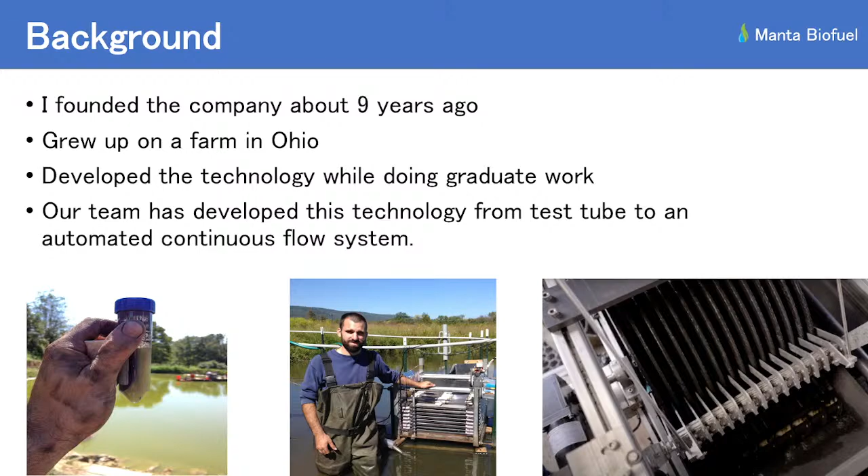We'll get into what we do and how our system works. Some of it should be pretty familiar. Some of it might be new. And then show you the pilot runs that we've done, some of them in Illinois. All right, so the first thing is, I'm going to step back here just a bit so I can see. So I founded this company about 9 years ago, and we've been working in cleaning water, mostly removing suspended algae from water, for close to 10 years.

And I've got an interesting background in that I grew up on a 2,000-acre grain farm in Ohio, so I don't mind getting my hands dirty. It's actually my hands right there. But I also have technical training, and the technology I'm going to show you today is stuff that I came up with during my graduate work. So I'm kind of an odd duck, having both this practical background and technical background. And what our company has done is we've taken this technology and scaled it from working in a tiny little test tube like this to various prototypes, some of them more ugly than others, to a fully autonomous system that can basically process and clean water continuously by itself.

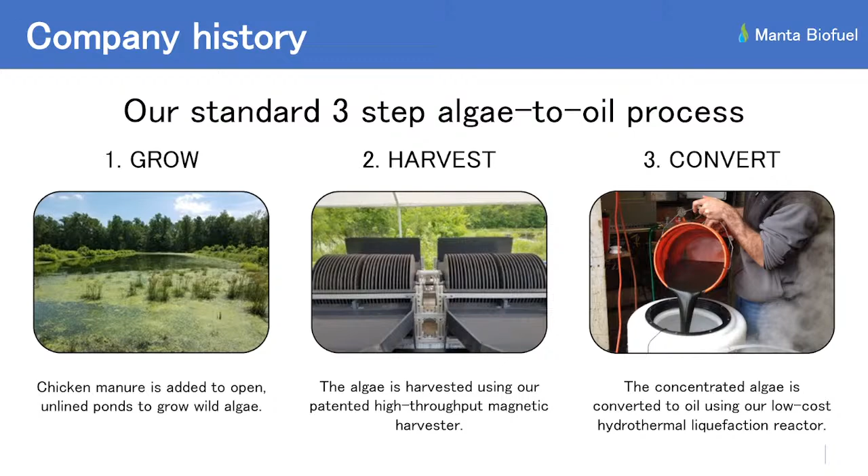All right, so historically, this is what the company has done. We've grown algae, harvested it, converted it to crude oil. And the way we would grow the algae is actually pretty similar to how algae would grow in a lagoon system, except we're using chicken manure to grow it. Then we use our magnetic harvesting system to separate it out of the water, and then convert it to crude oil using a process called hydrothermal liquefaction, which is a bit of a mouthful. But essentially, this is a continuous flow pressure cooker, and it converts that algae, the stuff you probably see growing in lagoons, into something that looks like that.

And you can actually take that and distill it into renewable gasoline, diesel fuel, jet fuel. You can get asphalts, plastics, all sorts of cool stuff. The difference is that you are farming it instead of drilling for it. And again, I grew up on a farm. About half of my family's corn goes to ethanol. This is just the next step in that. So at this point, you might be wondering, how did these guys get into wastewater? Because it doesn't seem like the transition is too easy.

And basically where we got to is we were working on finding a filtration system to put on the end of our separator, like a polishing system. And we were working with one of our vendors, and unfortunately the system he had didn't work for us. But he mentioned that lagoon operators often have issues with algae, with suspended algae. And so he gets calls from them all the time to deal with that, but unfortunately his system doesn't work that well for that. But the system we have was purpose-built to do exactly that. And so it does it very effectively.

And so what we did is we basically started calling around. We've talked to about three dozen people in different states, including Illinois, to see if that is actually an issue. And basically what we heard is this, which is that during warm weather, you can get overgrowth of kind of suspended algae. It can mess up TSS. This issue is usually temporary, but it's difficult to deal with.

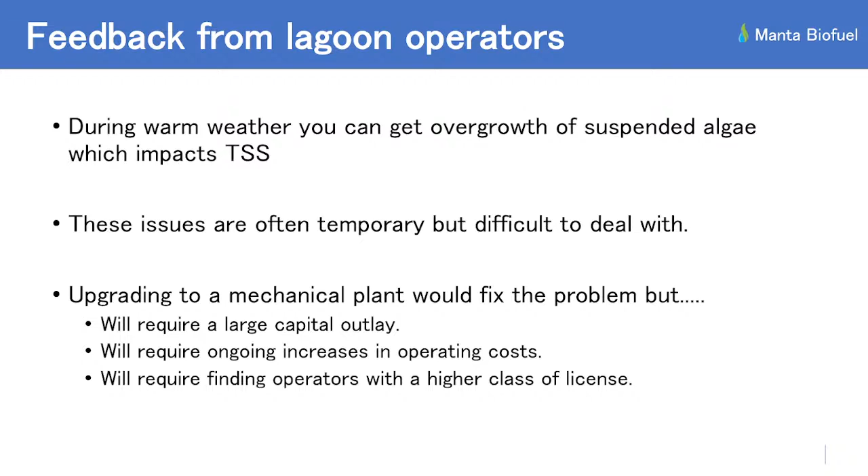Best way to solve it would be if you just put in a mechanical plant to fix the problem. And the but there, which we've heard many times, is that, yeah, you can do that, but that's going to take a lot of money. You're going to have ongoing increases in operating costs, and you're going to have to find an operator to run that. And what we've heard is that finding an operator for lagoons can be challenging enough. Finding operators for a mechanical plant would be even harder.

And by the way, if you guys have any questions, feel free just to stop me whenever. Happy to answer any questions.

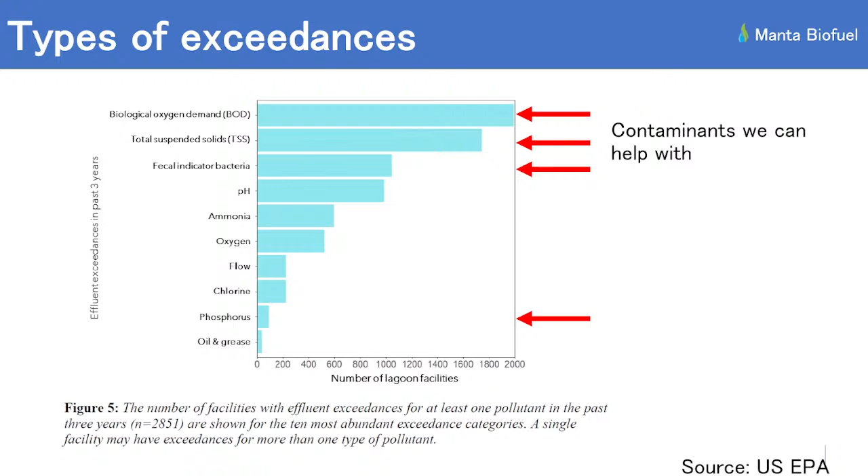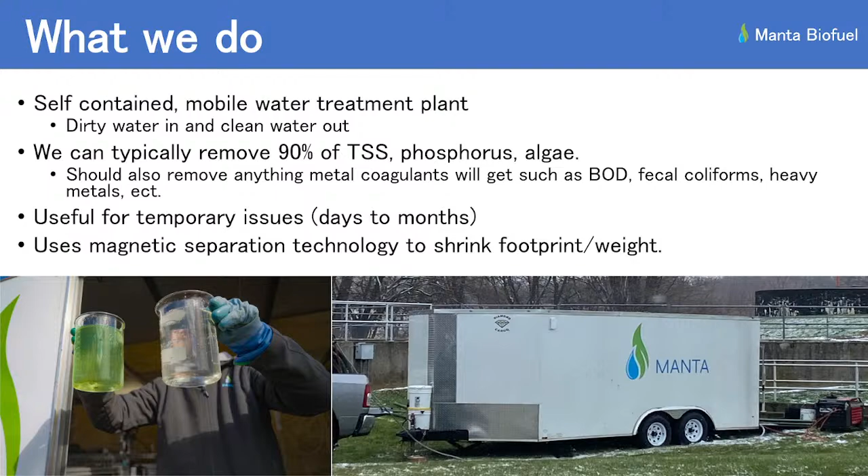All right, and so what do we actually do? So our machine is essentially a self-contained mobile water treatment system. At the simplest level, it's dirty water in, clean water out. And so you can see some of the water going in, some of it going out, and you can see the difference there. And I'll show you the actual numbers in just a bit. And so we typically get about 90% of the contaminants out, TSS, phosphorus, algae.

But the core process that we use has been used in wastewater treatment for decades. It's kind of a metal coagulant process with a bit of a twist. And so we should also get out things like BOD, fecal coliforms, heavy metals, a whole bunch of other things as well in the process. This is useful for any temporary problem, days to months. And it uses this magnetic separation technology. And what that really allows is to really compact the footprint. And I'll get into that in a little bit.

And so this is what our system looks like. And so the question is, okay, how does this thing actually work? What's the magic that's inside of this trailer? And so it's using pretty standard chemical coagulation technology with a bit of a twist. So probably most of you guys have seen this before, but this is chemical coagulation. In a nutshell, you got wastewater coming in, you add a coagulant. Typically these are metal salts such as ferric chloride or alum, but there's others as well.

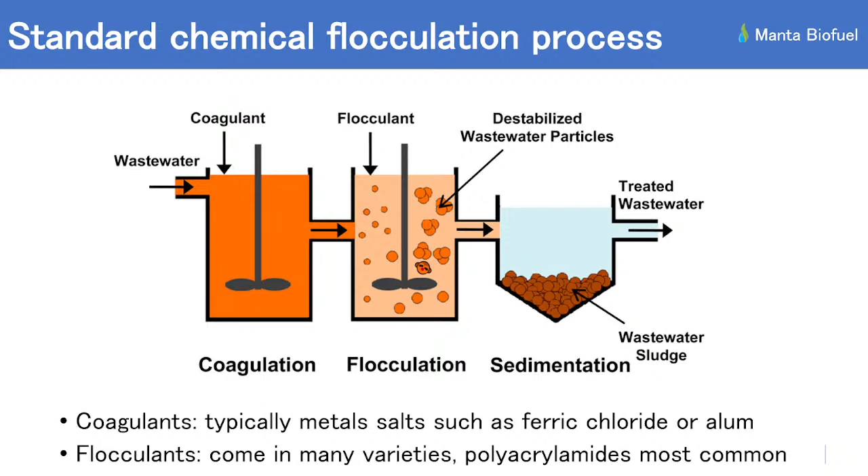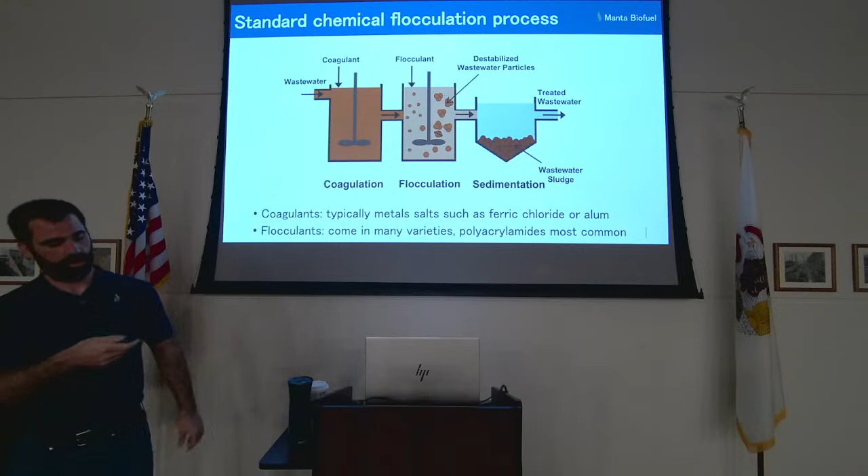And with mixing, you start to get coagulation. You start to get these smaller particles coming together into larger ones. And then you add a flocculant, and this brings these particles together into larger flocs. There's piles and piles of different flocculants, but the most common ones are polyacrylamides. And essentially what you end up with are these large flocs. Flocs can then go and settle out. You get clean water off the top, flocs settle to the bottom. And so you have coagulation, flocculation, sedimentation.

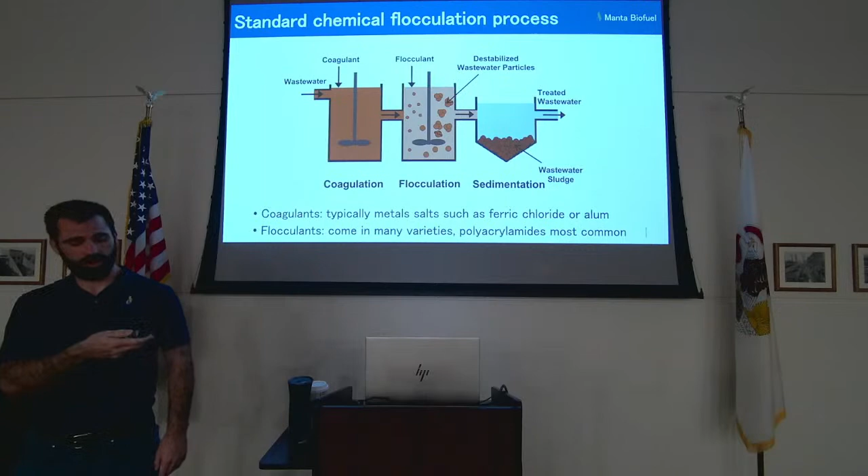All right, almost all of that is the same with what we do, but it's got a bit of a twist to it. So we add magnetite in the beginning, and magnetite is essentially just magnetic sand.

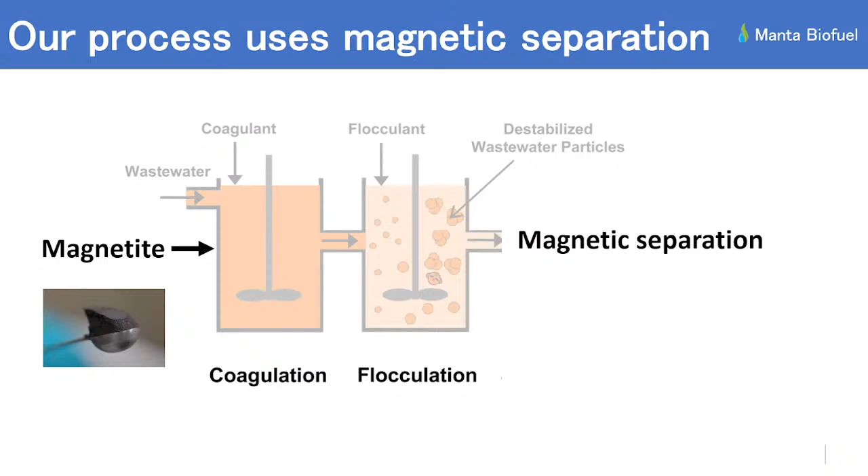If you've ever been to a beach and you see black stripes in the beach, that's magnetite. It's actually used in making steel as well. It's just essentially a magnetic mineral. So we add that to that process, and now in the end, those flocs are actually magnetic. And so you can take a magnet and you can pull them right out of the water.

It's pretty cool. And what also is different, instead of letting the stuff settle, we do magnetic separation on the end of that process. And that allows us to basically do that separation vastly faster. And so I can drone on all day about that, but it's always better to show than tell. And so this is what the process looks like at small scale.

So we have a beaker with some algae. We have magnetite, ferric chloride. Quickly get flocculation. And then you put it on a magnet, and very rapidly, what you end up with is nice clear water. And so before and after, and believe it or not, on the machine, it's actually even quicker than that, because that's just a batch run. The machine is continuous flow.

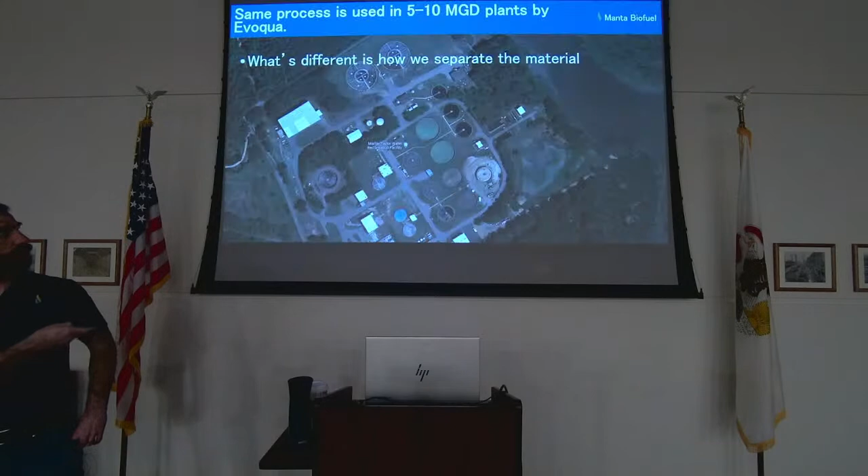And so while adding this magnetite might seem a little exotic, it's actually used by Evoqua. I don't know if any of you guys have heard of Evoqua. They're a pretty large wastewater treatment company.

Sorry. Can you move it over just a little bit this way? Is that possible? All right. Thanks.

So Evoqua uses this sort of process at a pretty large scale, at 5 to 10 million gallon per day plants all around the country. But there's a bit of a difference. What they do is they add this magnetite and it makes those flocs heavy, and they sediment the stuff out. And so that drastically speeds up the process, but still not as fast as what we can do.

And we're working with them right now. We actually have a pilot that we're scheduling. It's probably going to go this month or next month, because they're actually interested in using the technology that we have. But what we do differently is we actually do that magnetic separation. And this is one of the plants that's near us. This is where we're going to actually be doing that pilot. This is Marley Taylor, and this is about, I think, a 4 MGD plant.

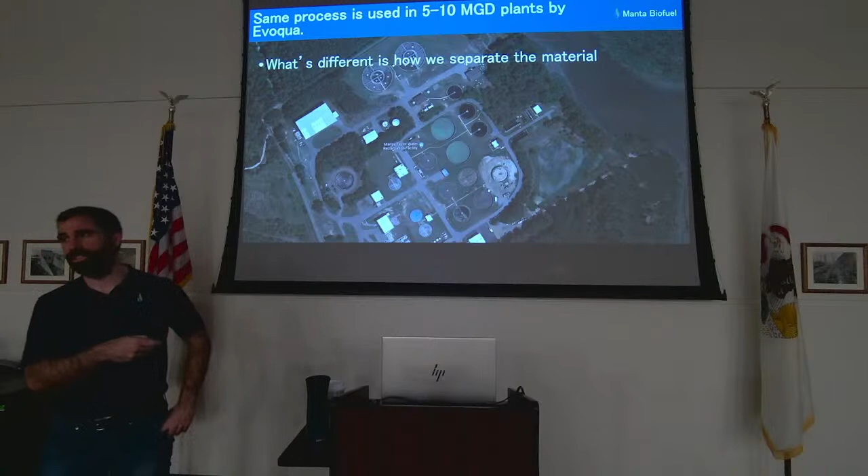All right. And so just to make it a little bit easier to tell what the difference is, as a reminder, once you get that flocculation, you let the stuff settle out, you let it sediment to get clear water going off the top. Our system, we're using these magnetic discs. These are actually magnets that we custom make, custom machine. And we do magnetic separation.

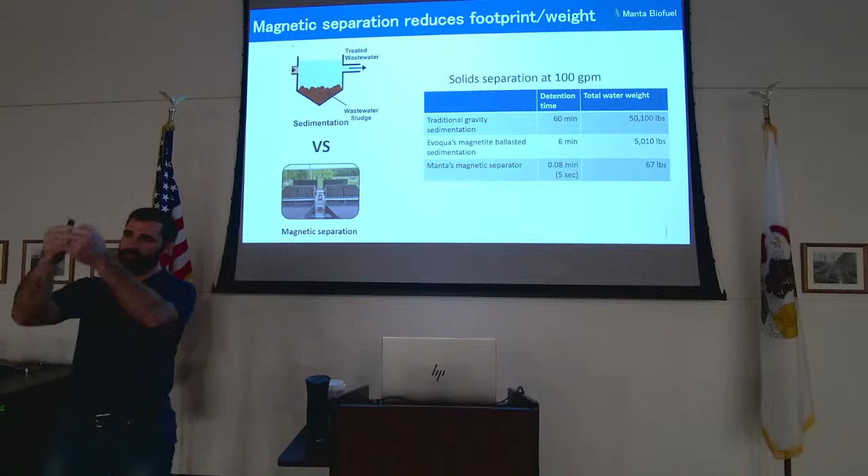And to put some numbers to it, if you're working with a 100 gallon per minute system doing traditional gravity sedimentation, you might need a detention time of about 60 minutes. You might need up to 4 hours, but that's at least a starting point. With Evoqua's system, they call it a ballasted system. They add that magnetite, that makes those flocs heavy, and they settle out rapidly.

And so they claim that they can decrease that detention time by about 10 times, so about 6 minutes. With our system, that separation step takes about 5 seconds. And so you can go from 60 minutes down to 5 seconds. And so that's why we can actually make this mobile.

And part of that comes down to the amount of water weight that you need to have for this. So for a traditional system at that flow rate, you need about 50,000 pounds of water inside the system. If it's built infrastructure, it doesn't really matter. If you're trying to make it mobile, that matters dearly. And so with Evoqua's system, you could take that down to 5,000 pounds. With ours, that's down to 67 pounds.

And so you have a lot less weight in the system and a lot less volume of water. And so that's the real difference right there: because we can separate so quickly, we don't need nearly as much space.

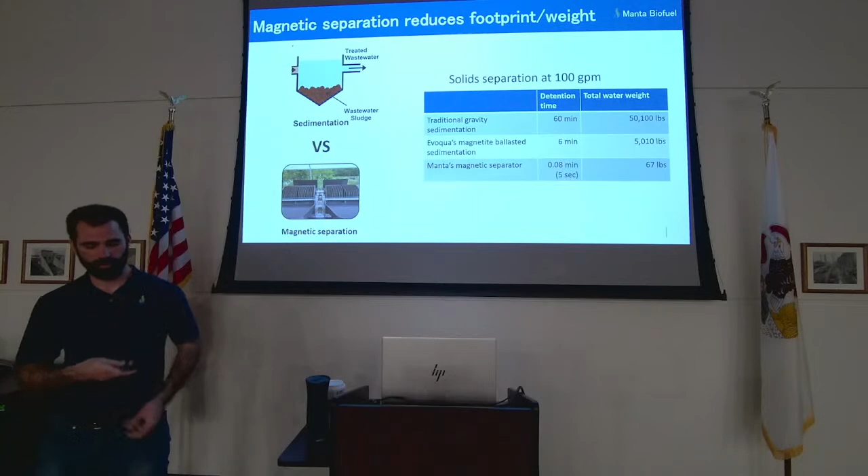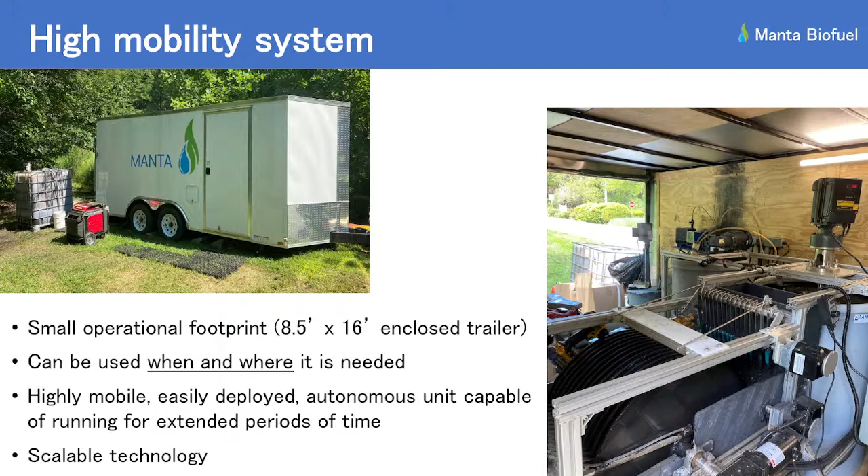All right, so this is what our system actually looks like. This is the separator on the inside. This is all right now within an 8.5 by 16-foot trailer. And you can tow this when and where you need it. It can run on a generator. If you have mains power, you can also run it on mains power. So it's highly mobile, easily deployable, autonomous, and highly scalable.

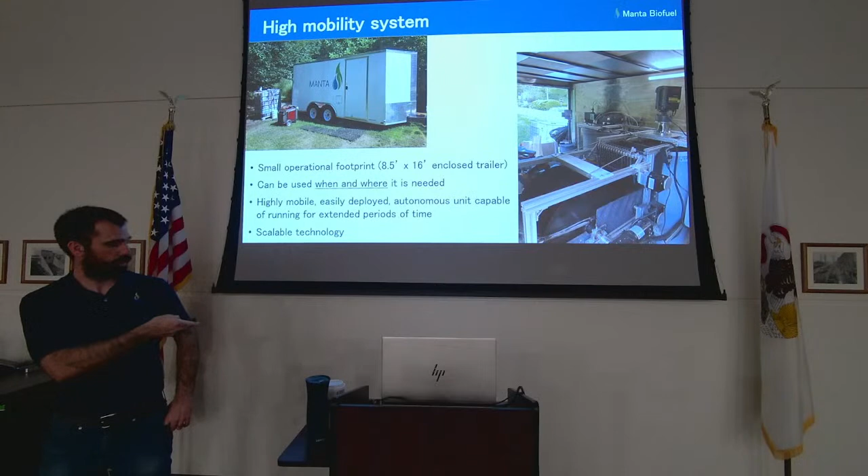And so the way you add more processing capacity is you add more of these disks. So essentially you get your first coagulation in this tank, and then you get flocculation in this tank, it flows to this, and this does the magnetic separation. And so that's how the process works. Again, I can talk about it, but I can show you how this system actually gets deployed.

You can tow the system to where you need it, open it up, and it really quickly deploys. Everything runs off a generator.

This is also a commercial for Honda.

Put the inflow in, get the outflow set up. Relatively quickly, you can have nice, clear water coming out. When you're done, everything packs up, and you can leave.

Does anyone have any questions so far? Nope.

So I would say that right now, the model I think we want to use is to find a local contract operator and partner with them, and then they can get called in basically when and where the problem is, and then leave. Mostly because it's temporary, it doesn't necessarily make a whole lot of sense for the facility to buy that machine. But we're definitely happy to hear what you guys think. What's the best way to go with this?

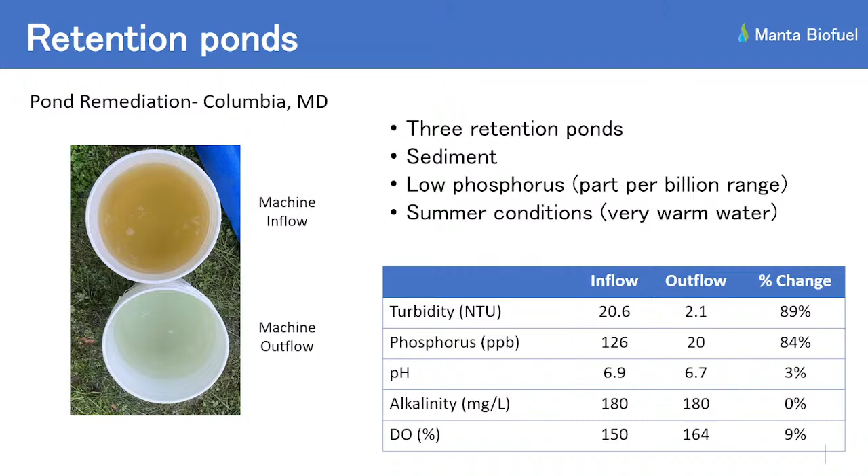And so again, proof's in the pudding. Here's the inflow, here's the outflow, and you can visually see it's much cleaner. And here's the numbers: inflow, outflow, percent change. You can see we take the turbidity down dramatically, phosphorus down below their limit. pH, alkalinity, and dissolved oxygen are essentially unaffected. And this is universal when we're running the system. The other important water quality parameters don't get impacted.

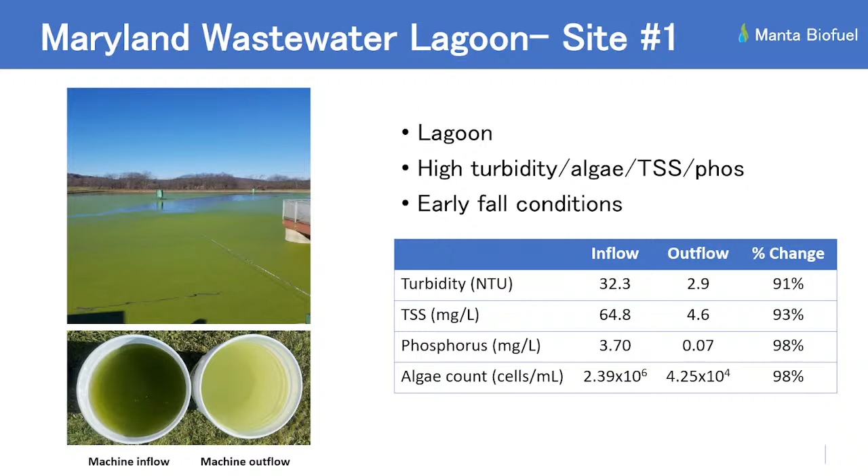All right, so this is a lagoon that we did in Maryland. Again, high turbidity, algae, TSS, phosphorus. These are early fall conditions. It's fairly warm out still. We were in t-shirts when we did this. And you can see, again, inflow, lots of algae, outflow, pretty clear. And you can see the numbers with the inflow to outflow and the percent reduction. Over here, we're looking at between 91 and 98% reduction. So we get pretty quick cleanup of the water.

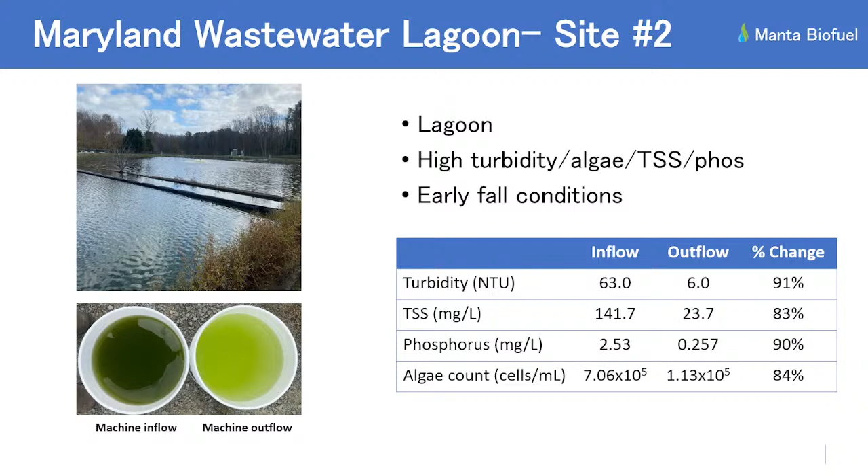All right, so this is another lagoon that we did. You can see inflow versus outflow. High turbidity, algae, TSS, phosphorus. A little bit cooler here, water's starting to cool down. And I'm gonna keep mentioning that because one question we get a lot is, okay, if this can work in the summer, can this work when the water's cold? And we've run this system all the way down to where the water is just a few degrees above freezing. So basically, if the water is not solid, if we can pump it, we can run it.

So here, again, you're getting, on the low end, 83 up to 91%. Nice knockdown of turbidity, TSS, phosphorus, the algae cell counts. Going from 142 there down to 24 in one step.

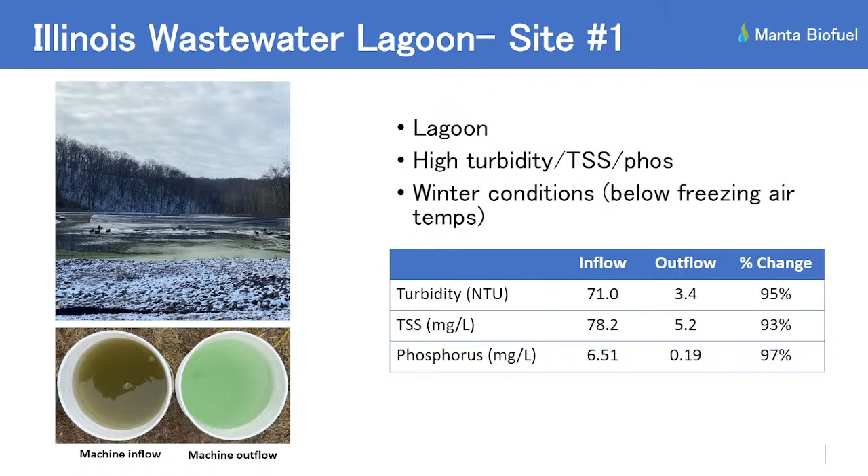All right, and so this is one of the jobs we did in Illinois. And so this is a lagoon, high turbidity, TSS, phosphorus. You can see, again, the visual change is fairly stark. You're going from 71 NTU down to 3.4. And TSS is dropping as well, and phosphorus as well. So nice removal. Does anyone have any questions here at this point? Yeah.

So these were all taken within the lagoon system. So we basically took from within and put it back into the system as well, so we're not actually discharging out of the system. So this number is probably some of the worst case you could see, but yeah, you could take it from outflow and clean it up, but we've got to get all the correct permitting in place before we can do that. This is just to show the technology can work. Does that answer your question?

All right, sorry, keep wandering over here. And so these were in winter conditions. I think air temperatures were around 20 degrees at this point. I remember talking with Kent, standing outside. It's a bit chilly that day. All right.

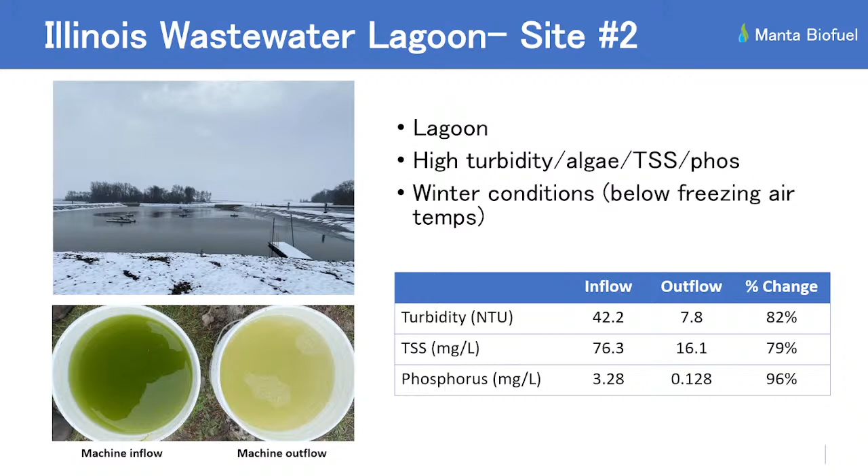And so this is at Dave's facility, Toluca. And so this lagoon, high turbidity, algae, TSS, phosphorus. And we ran this pretty close to the inflow of the system to essentially get the dirtiest possible water we could get. Again, give the system a good challenge. Inflow's 42, outflow's 7, 76, 16, and then phosphorus 3.2 down to 0.1. And visually, you can see a pretty large difference, inflow versus outflow.

And then the last pilot we did in Illinois is actually an activated sludge plant. So here we're not targeting removal of turbidity, although you can see that we did clean up the water just a little bit. This is actually targeting removal of phosphorus. And so I know smaller plants right now are not regulated for phosphorus, but pretty much to a person, everyone we've talked to has said that it's not there yet, but they expect it to be coming at some point. And so that was kind of the challenge that we were working with.

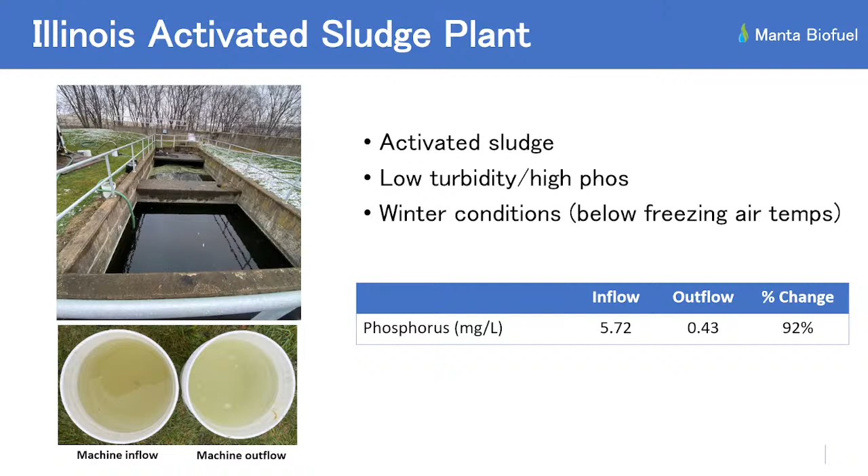And this particular facility has, I believe, a metal plating company that's on it. And that company intermittently causes the phosphorus levels to go quite high, and the system can't remove that phosphorus. And so here we're taking it from 5.7 down to 0.43. And so that's what we were testing with this one.

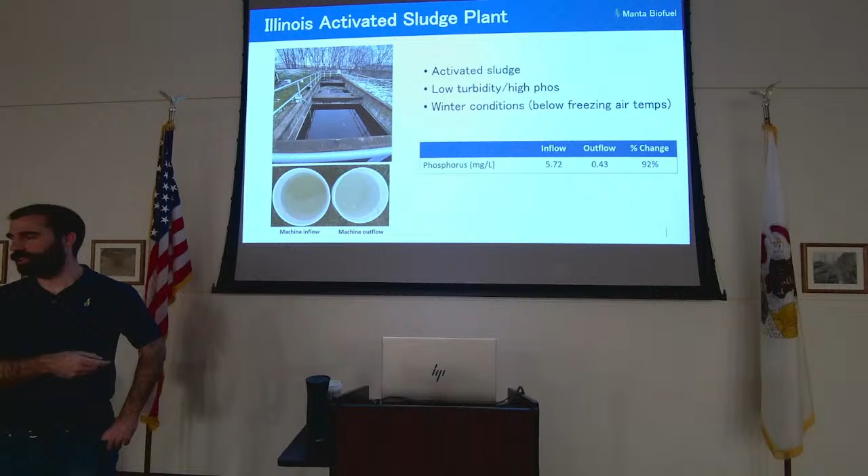Yeah, the clear water and the cold water together definitely make it a bit harder. Dirty warm water is by far the easiest because there's a lot of stuff there to pull together into those flocs. But yeah, that colder water, and that was another cold day. I remember standing out there. That was a bit more of a challenge, but the system performed really well. Once we got tuned in, the machine just runs like a sewing machine.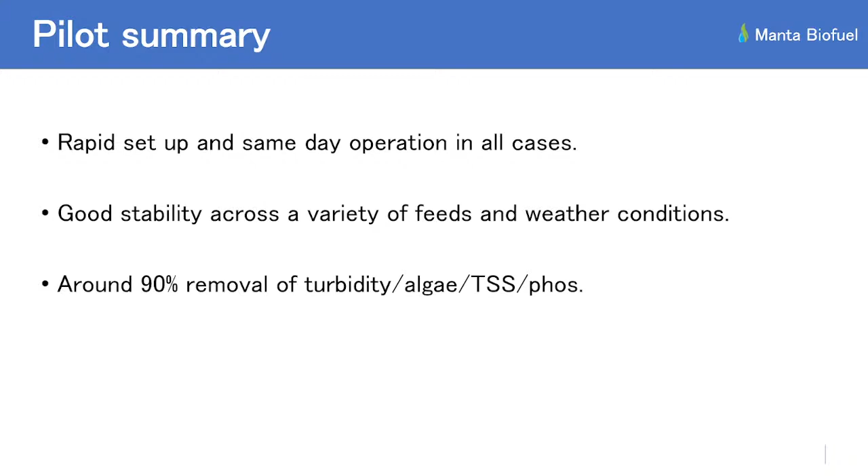So in all these cases, we're able to rapidly get set up, basically in the same day, and operate through once we got set up. We had good stability across a variety of different weather conditions and feed conditions. So I showed from pretty clean water all the way to heavily high TSS water, a lot of phosphorus, different temperatures, all the way from bath water to just above freezing. And in all those cases, we get around 90% removal of those target contaminants.

All right, so this is kind of a summary, and then I'll quit talking. You guys can ask me some questions. So just to remind you, what we're using is really well-known chemistry. We're using metal coagulation chemistry, which has been used for decades, and adding the magnetite itself has been used by Evoqua at massive scale for a long time. So there's nothing new there.

What is new is this separator. And so those magnetic discs, which are a whole heck of a lot of fun to figure out how to make just right, that's kind of the secret sauce. That's what allows us to actually separate this stuff so efficiently. And that's also why Evoqua wants to work with us, because we can make their system even more efficient.

And that's really what allows us to shrink footprint and allows us to put all this on the trailer. Without that, you still couldn't move this around nearly as easily. So right now we're engaging with Illinois EPA. We've got a good idea of what needs to be done to move this forward. It looks like it would probably be a construction permit. Once that construction permit is in place, then you could keep doing this on an as-needed basis.

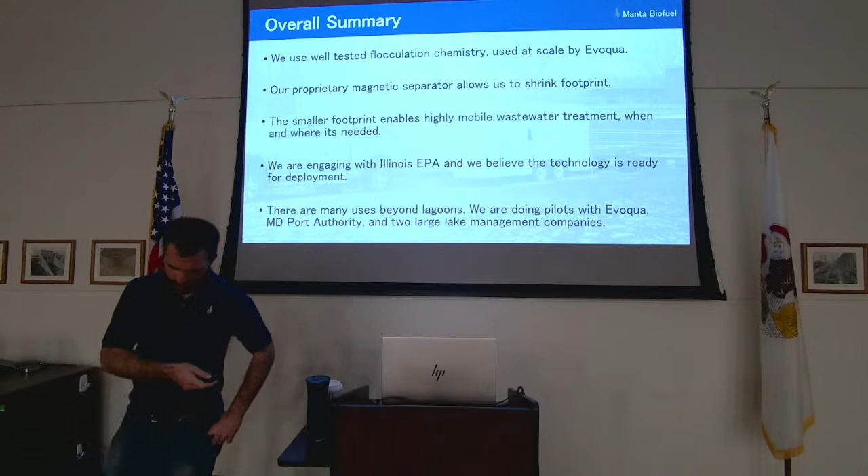But we're doing the pilots with Evoqua. We're actually doing 3 different test cases within their system. And we're working with Maryland Port Authority right now. Maryland Port Authority has kind of a unique use case. Within the Chesapeake Bay, they have these huge ships that bring all these shipping containers in. But the Chesapeake Bay is pretty shallow. So what they have to do is dredge out and make a channel. And all that material that they dredge out, they put in these enormous 100-acre holding ponds.

Once that stuff settles out, they have to release it. But they haven't actually been able to release that water for 7 months because the water doesn't meet their permit, basically. So you can imagine they keep dredging, and that water level keeps going up, and they're getting a little stressed about what they're going to do next. And so we're working with them.

There's also 2 large lake management companies. These are companies that specialize in cleaning up ponds and lakes, and they're interested in using this technology as part of their services. For example, you get ponds that have toxic algae, and people want to get rid of that toxic algae. So this is one thing you could use it for. So there's a lot of different places that you can use the technology, but we think lagoons are a pretty good fit.

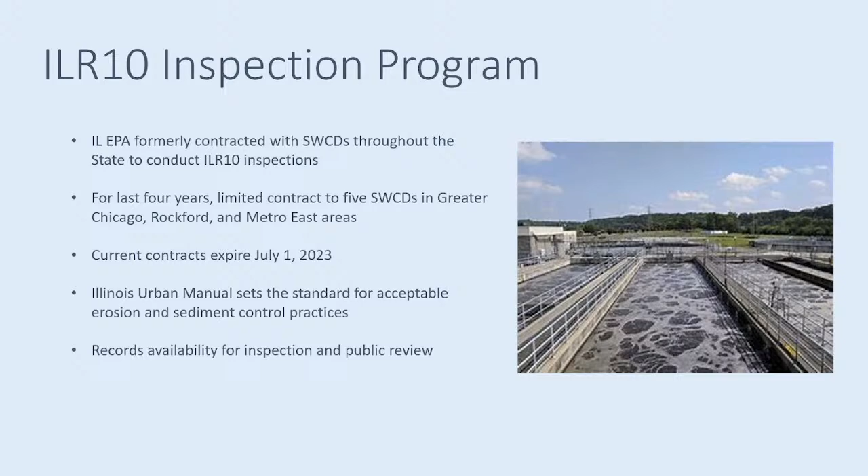I give this presentation to a lot of different folks. I know this isn't so much of a stormwater group, but one thing I wanted to note is that our permit section is basically rebuilding a stormwater permitting program. It's an area where we just have been very short on staffing on the permitting side to give the proper review for the SWPPPs that come in.

And so this probably doesn't affect this group as much, but it is something that is in the works. They're going to hire a manager, a lead worker, and several devoted permit engineers for the stormwater program.

So since December of 2016, the phase one aspect of this e-reporting rule is DMRs. And I think Illinois in particular has been ahead of the game with regard to moving forward. And so I think a lot of the problems have been worked through, a lot of the issues that we've addressed with getting adjusted to the NetDMR system. Well, that's just phase one.

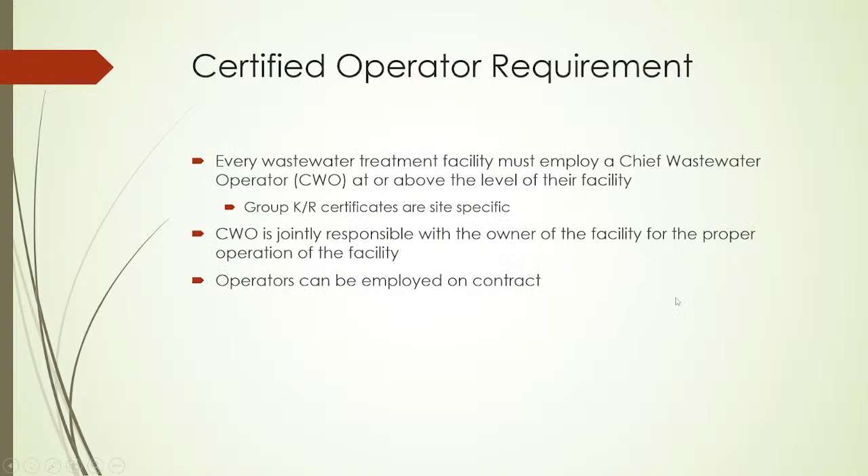So our cert program, that goes from the initial exam period to your renewal period. Every wastewater treatment facility is required to employ a chief wastewater operator at or above the level of their facility as specified in your permit. Group K and Group R, those are industrial systems. Those certificates are site-specific. The operator is jointly responsible with the owner of the facility for the operation of that facility. And as I'm sure you know, operators can be employed on contract.

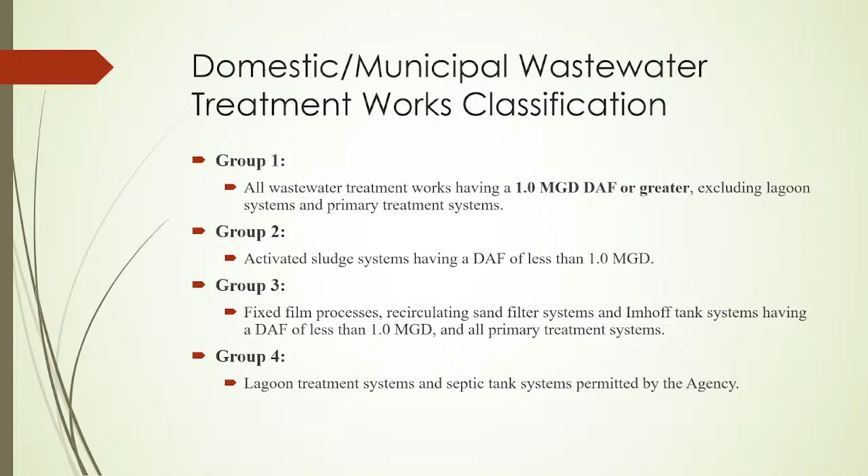I'm not going to go over this too much. Group 1's our highest level of certification and facility classification. Group 4 is the lowest. Group K are our industrials, and Group R are our industrial remediation sites. Okay, back in 2019, we had changes to our operator certification regs go into effect. I hope by now you're relatively familiar with them, but if not, buckle up. These established renewal dates and renewal training requirements, and it also established our operator and training program for initial certification.

So I'm going to go through the certification process because it is a little different. I'm guessing a lot of you in this room are already certified, but if you're going for a higher level or have somebody on your staff that's looking to get certified, it has kind of flipped in reverse. The first step is to take our test, and we no longer review full applications with experience before you take our test. The only thing we need to test is that exam request form, and that is essentially contact information and a few questions. You'll fill that out, send it to our office. There's no fees associated with anything certification-wise on the wastewater side of operator certification.

Once we get that exam request form, we then send you a letter of admission, and they're no longer specific to a site or exam date. It's a general letter of admission. It's good for one exam attempt anytime within the year after that letter was sent. Then it's on the operator to call whichever exam site they want and schedule that test. Our sites are filling up quickly, not as quickly as they were right after COVID, but they are still filling up. So if you have somebody who thinks they want to take the test, I would recommend calling as soon as you think you want to take it. Especially up in Des Plaines, that site tends to fill up pretty quickly.

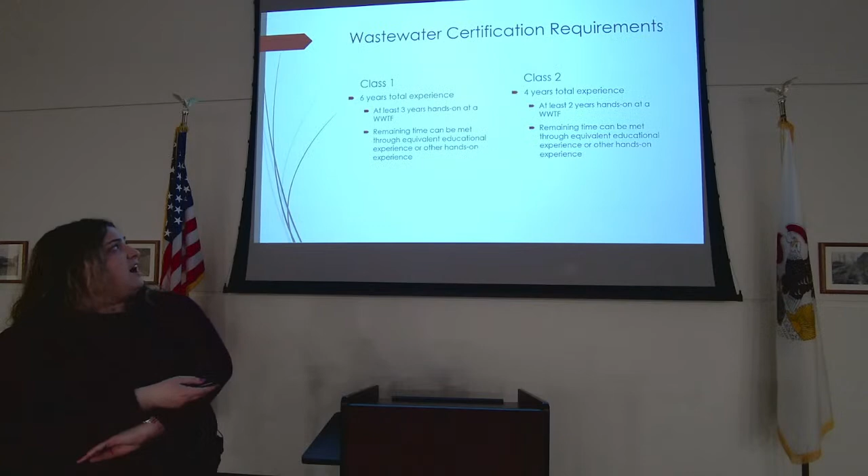I want to go over certification requirements because they did change a little bit from what they used to be. Every level, at least half of the required experience has to be hands-on at a wastewater treatment facility. Class 1 requires 6 years total of experience. If you have 3 years hands-on at the wastewater treatment facility, the remaining time can be met through equivalent educational experience or other hands-on experience, and that would be collection system experience, a public water supply, or at a lab. Class 2 requires 4 years of experience total. Class 3, 2 years total, and Class 4, 1 year total.

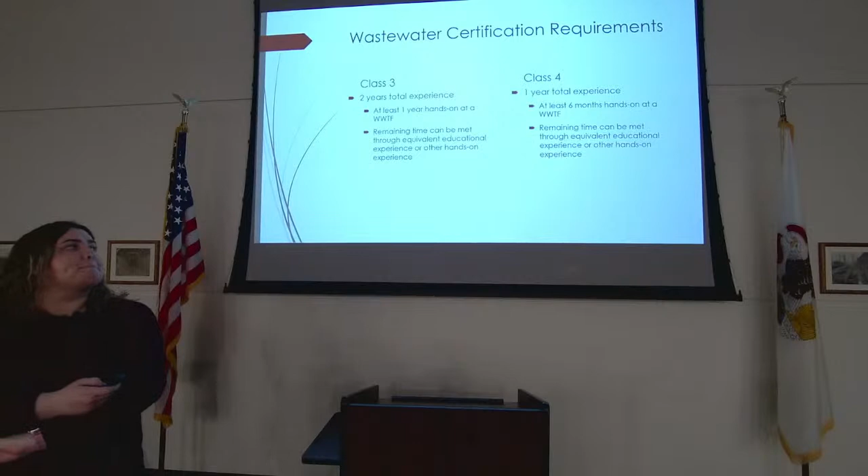Our collection system licenses, those are not required for any facility. That's a voluntary certification. They don't expire. Those require 1 year total of experience, at least 6 months hands-on with a collection system. And then our Class K and Class R, those are a little different. Those are a written exam. The Class K are site-specific. They're graded by our permit section.

If you work at the facility, that's your experience. There's no timeline for how long you have to work there. If you leave the facility, that certificate becomes invalid, and if the facility has significant process control changes, like something that would require a new construction permit, then the Class K operators would be required to retest.

Let's get into renewals. So, fully certified wastewater operators are required to obtain a specified amount of training, and this is just for the Class 1 through 4 operators. The training has to be obtained within the 3-year period that the certificate's set to expire. The licenses are always going to expire on July 1st of whatever year it's due. It's always going to be July 1st. If you get more than the required number of training hours, they don't roll over. You're just smarter, but those don't roll over.

Class 1 and 2 certificates require 30 hours of training. Class 3 and 4 require 15 hours of training. No more than 1/3 of that total can be of a non-technical or professional nature. So at least 20 hours have to be technical for Class 1 and 2. At least 10 have to be technical for Class 3 and 4.

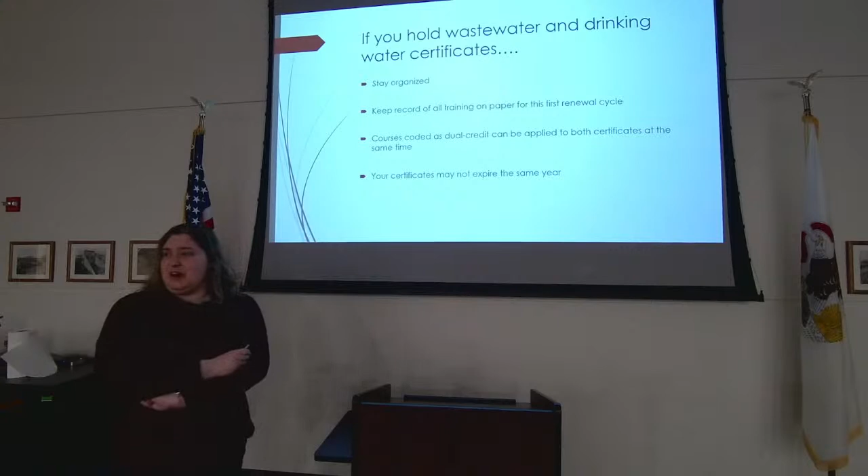Because our database was only built to handle drinking water renewals, when your drinking water license renews, it's going to clear out everything in your training log. So make sure you're keeping record of your training somewhere else in addition to in our database. I hope your licenses expire the same year, but I bet they won't. I'm sorry.

After July 1st, if you don't meet that renewal requirement or don't get the application in to us, the certificate expires, but there's a 2-year restoration period. So anytime within those 2 years, if you get those 30 hours or decide, hey, never mind, didn't want to retire, I want to keep my license, you can send us your renewal application, send us all of your training, and we can restore your certificate.

The new expiration date is going to be what it would have been if you renewed on time. So if you let your license expire this year in '23, you have until July 1 of '25 to send us that restoration, but it's still going to expire in 2026.

And then if you pass, that's the grace period. You know, we come up to that 2-year mark and we get a lot of drinking water operators saying, what about the grace period? Those 2 years were your grace period. After those 2 years, you have to start over, retest, reapply for certification. Collection systems, those don't expire. Those are good forever as our rules read.